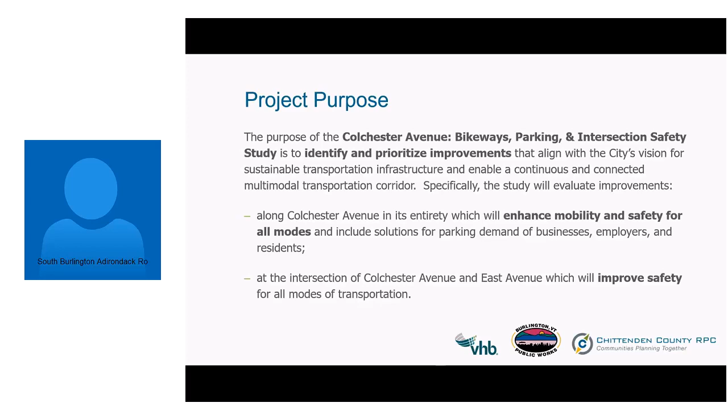This is Dave Cawley. I appreciate the inclusion of the vision elements to the purpose statement. I think that helps us get a better handle on it. One of the questions I had, and it may be bigger than we can deal with right now, is there's a question about the time frame, meaning the improvements we're making to this corridor—how long will they be in place for? Is it something that's good for a year, 5 years, 10 years? I haven't heard any sense of time regarding improvements, so I'll leave that as a comment.

Okay. Anyone else? Could I just ask a clarification with regard to Dave's question? With regard to time, are you talking about once some sort of improvement is implemented, the lifespan of the improvement, or are you asking the time it will take to build the improvement? It's the lifespan of the improvement. It helps me to think, when we think about vision and what we're trying to create, is it near-term improvements or long-term improvements? I don't think we've talked about that yet as a team. Okay, got it. Thank you.

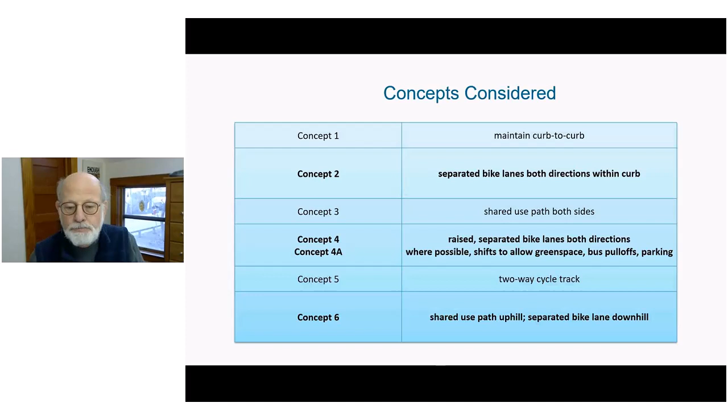When thinking about the concepts to carry forward through this process, I know the last time we all met, we had brought to you all some cross-sections, some ideas to get a sense of what elements we wanted to see along the corridor. The first couple of concepts you see on the screen now were the elements and layouts we had discussed for the corridor, segment by segment.

I think it's important that we share with this group and talk through the fact that after that meeting, we came back and generated a few other concepts or ideas that we wanted to at least evaluate at a high level, based on the feedback we were hearing from the group, to see if those elements would work along the corridor.

So we landed at generally six concepts that we discussed with the project team here and the folks at the CCRPC and the city, to carry it through the next step of the process and see if the things we were calling for in that meeting and the feedback we were hearing were concepts that would work, so that we could land at alternatives that had the elements everyone was calling for.

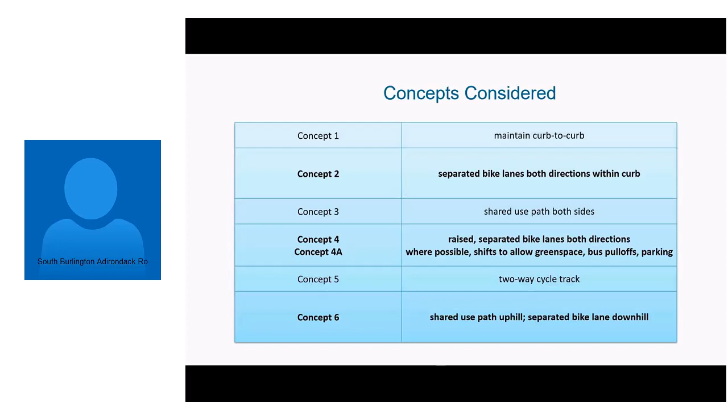Concept 4, and then 4A, which you'll see later on, that's why it's bolded here: raised and separated bike lanes in both directions. And then we have a version of that where we've done some enhancements to create a little more green space, some bus pull-offs, some parking where possible — getting at that balance of impacts to the back of sidewalk and beyond with some of the elements folks are calling for in terms of more green space, more transit accessibility, more space for parking.

And then concept 5, a two-way cycle track. We did at a high level evaluate an option of having a two-way cycle track along the corridor. I think ultimately we decided that the contraflow, especially with a steep grade section like the hill down into Winooski, was really challenging to find a safe way to implement. But we did have a pretty lengthy discussion about that as an option, and ultimately decided not to carry it forward as an alternative through this process. But we definitely wanted to highlight that we had taken a look at it and really tried to see if it would work for this corridor.

Just to orient you quickly, what you're seeing on the screen is an aerial image in the background with yellowish, tannish filled sections representing sidewalk or pedestrian space mostly. In some cases with the wider shared use path, we're maintaining a 10-foot wide shared use path, highlighted in that same color. The dark gray fill is along the bike infrastructure. So that's a way to highlight where we're anticipating pedestrians will be and where we're anticipating bikes will be in this particular option.

Starting from Prospect and moving towards the hospital entrance, you see that 10-foot shared use path on the south side that we're maintaining essentially where it's proposed to be when construction starts this summer. We're maintaining along this section basically where the sidewalk exists today, but the major changes here are that we're bringing the curb in pretty significantly along this segment and have a raised and separated bike lane.

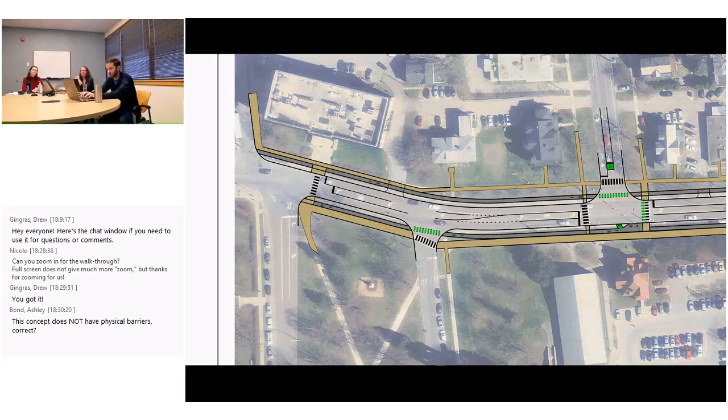You'll see it tends to be adjacent to the shared use path on the south side. The idea is there would be a small curb that vertically separates the two, giving that distinction, and the pavement surface treatments would be different. In a lot of places you'll see asphalt pavement for the bike lane, and then maybe a 2-inch or 3-inch vertical separation up to a concrete shared use path on the south side, or a concrete 5-foot sidewalk on the north side. One over, just so they can see the rest of the sheet.

Sort of bring you along here.

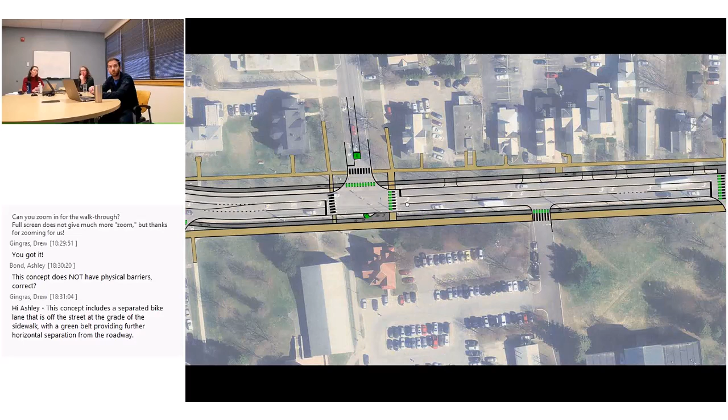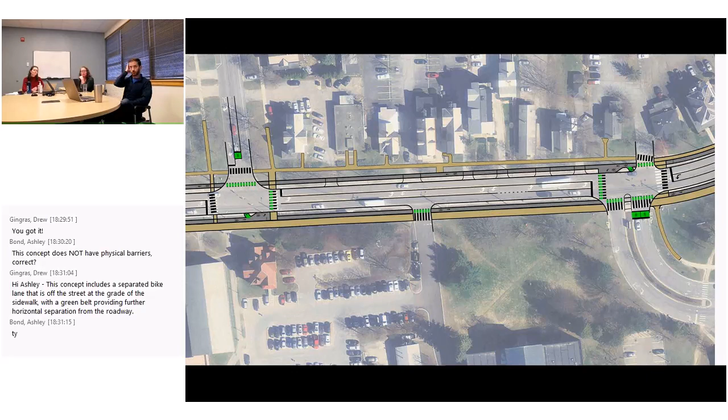Some of the elements we were adding in are definitely looking to accommodate both bikes and pedestrians at intersections. At the intersection of Mansfield, we're anticipating a shared use path on the east side of Mansfield Avenue, accommodating both bikes and pedestrians across Colchester Avenue, and giving bikes an opportunity to get into the bike infrastructure from that intersection. So if you're coming off of Mansfield and making a left, you have a way to get onto the bike lane eastbound.

Similar treatments at the medical center driveway, sharing the crossings for both bikes and peds, making sure both are accommodated and allowing folks on the westbound bike lane to make that left into the hospital entrance.

If I could just weigh in, I took a look at the operations of this intersection. It's already operating near or at capacity currently, and there's housing development with residential units proposed on the north side. Even with the current signal timing, which only has 10 seconds of lost time for advance start for pedestrians to cross before the UVM Medical Center Drive gets the green, it's already experiencing problems. So there will be a bit of an impact to vehicle capacity at this intersection in order to accommodate all the crossings we're showing here and ensure bikes and peds cross safely.

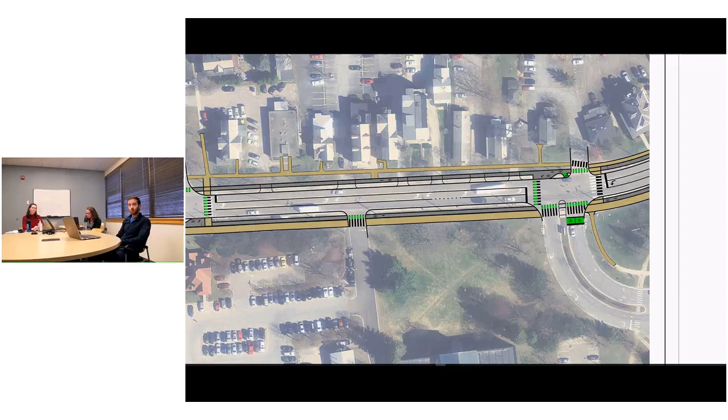I bet you have to make it. Yeah, I'm trying to navigate how to actually do that. Okay, sorry for the delay.

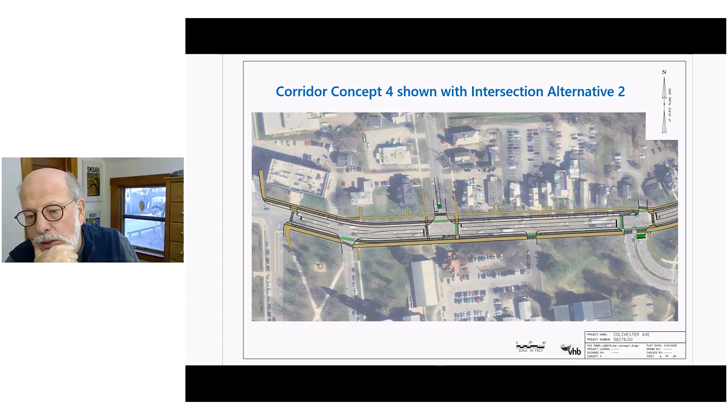All right, so moving east. I have a question, just to be clear, will the bike lanes be raised on both sides of the street in this scenario? Yes, that's the intention on this one.

Maybe just to give some visuals: your typical 6 or 7 inch curb reveal from the edge of the vehicle's travel lane, and in this case along this segment, a 6-foot green belt so we can accommodate some street trees in that width. Then at that height of your typical green belt would be the bike lane, essentially at the same vertical height as your green belt today.

Hi, this is Chris Damiani from Green Mountain Transit. I was also just wondering if in future drawings for this, we could overlay the GMT bus stops on there, just to make it a little easier to see where those potential conflict points are.

Absolutely, yes. And one other thing, I think I sent this after our last meeting, but it'd be great to potentially see if we could have some sort of, it's great that the bike lanes are going to be raised, but also include some conflict markings where those bus stops are on the bike path. Good comment, thank you.

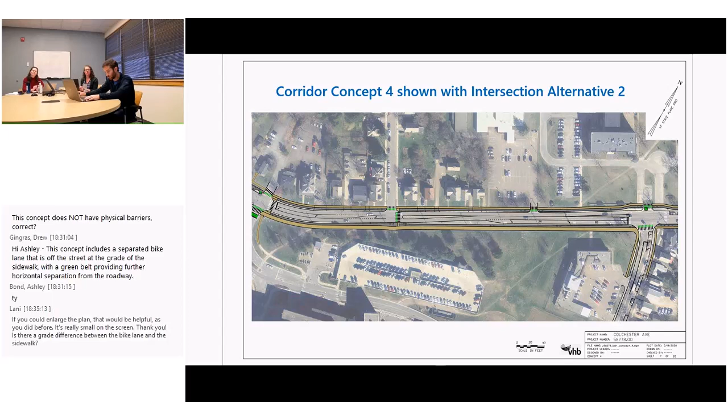Okay, do you have it somewhere? Like, do we have a schematic that has all the dimensions so we can see? It's kind of hard to judge now. We can prepare that, since we had developed those previously for the alternatives, and we can certainly do it for these new alternatives as well. Okay, all right, thank you.

So continuing eastward, we had heard that the mid-block crossing rapid flashing beacon at Fletcher Place has been a success. Building off of that element, we're adding a left-hand turning movement for bikes to share that crossing with pedestrians, getting folks onto Trinity campus and into that neighborhood a little more easily from the bike infrastructure.

Continuing along the corridor, it's worth mentioning the alignment is a little different with the right turn lane. Instead of folks just ending up in the right turn lane, the roadway actually realigns eastbound so that you are making a conscious choice to get into that right turn lane.

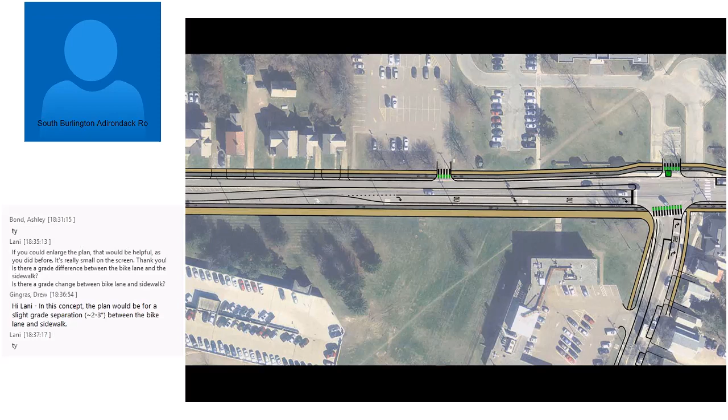Approaching the intersection, in this alternative, we're looking at keeping the bike lane to the south of that right turn lane and then accommodating the bikes via a signal. So instead of bikes having to mingle with traffic and get into a through lane to continue eastward, in this case they would stay to the south of those right-hand turning movement vehicles and be accommodated at the signal. They would have to stop and go according to their own signal heads, most likely.

Drew, do you want to comment on how the bikes are making the left turns here? Yeah, so just reflecting back on the first advisory committee meeting and the public meeting, we had a number of comments about left turning cyclists, so we've instituted along the way here either a bike box treatment or a two-stage left turn box treatment, dependent upon the intersection.

For instance, at East Ave, for a westbound cyclist along Colchester Avenue looking to travel along East Ave, we've shifted the bike lane and the sidewalk, as well as the UVM drive in this case, since it's a 90-degree four-way intersection. We've shifted the bike lane and sidewalk north a touch to create space for that two-stage left turn box. So a bike traveling west along this facility would queue in that box in front of traffic coming out of that driveway.

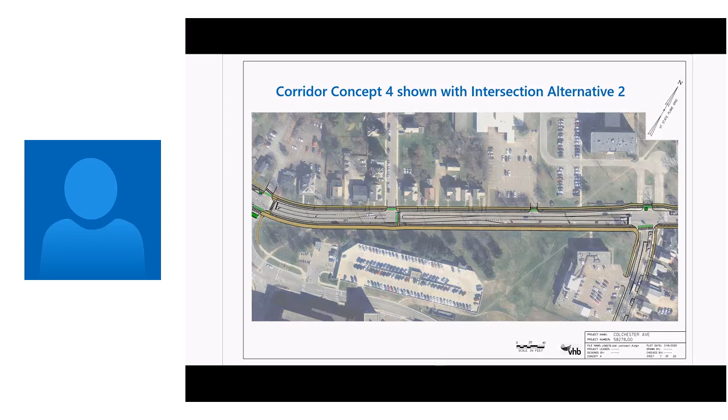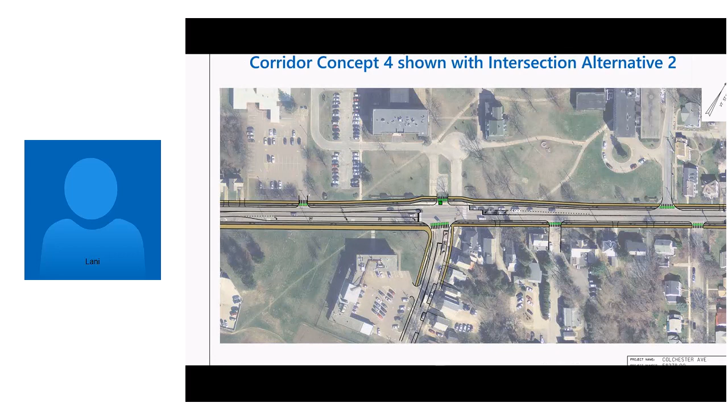And that's just more of a centered look at that intersection with the realignment. With the realignment for UVM, do you know anything about the infrastructure underground?

We do not. The exact alignment would have to be developed once there was actual survey and some of those details are determined. Because truly, in this concept, we didn't realign East Avenue that significantly, and the alignment could shift either further to the west or stay closer to where it's currently located to the east. There's a possibility it could be realigned far enough to the west that it would be over the driveway that's currently a stub but already a driveway to the north. So there's a number of options here for how this intersection could be aligned once it goes to survey and construction, but obviously the goal is to make it a standard four-way intersection because that's best operationally for everyone.

Thank you. I have another question about the height differential between the sidewalk and the bike path. Is there precedent for a 2 or 3 inch differential? I'm thinking, is there a safety problem with such a small difference? Will people trip or will bikes bang into it?

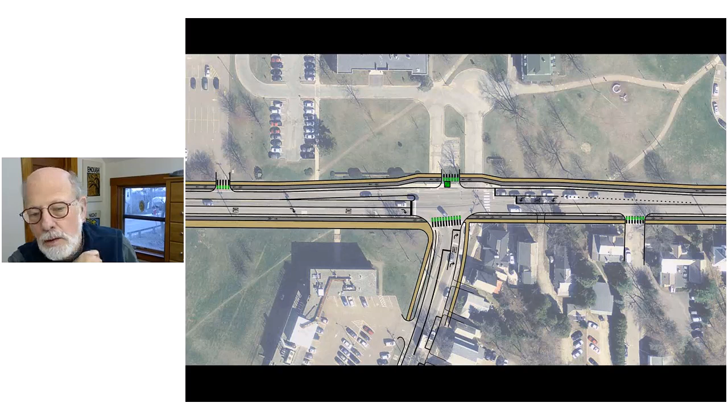All right, so continuing along the corridor on concept 4 here. A question just before we leave East Ave: can you describe the changes happening on the northbound side of East Ave at the intersection, as you're heading north towards Colchester Ave? Oh, East Ave. No, here we're just showing a slight realignment, and one of the things we did do is eliminate that first parking area. It's not a significant change. What that does is give us a little more queuing space for those right-hand turning vehicles, so we're able to accommodate that movement a bit better by eliminating, I think, essentially one parking spot close to the intersection.

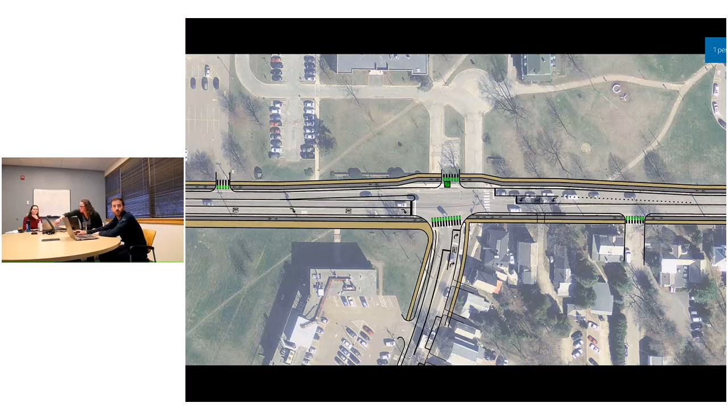Thank you. Hi, can you hear me? This is Sharon Busher. Yes, we can. So there's actually more than one parking space there, because those were put in place, I think at least two, when the India House first went in to accommodate their drop off and pick up. I can't remember if it's one or two hours, don't remember the limit, and certainly not easy to enforce since no one's checking how long people park there. But it's more than one space. So are you eliminating all of those spaces that have a sign saying one hour or whatever? I believe it was a total of 3 spaces, two up close to the intersection and one further back. We can confirm that. I'd say at most two spaces would be removed in this concept to create more queuing space for that right turn only lane. Okay, so two spaces. All right, I just wanted to understand that better. Thank you.

Okay, any other comments on this alternative at the East Ave intersection before we move eastward? Okay, we will see the East Ave intersection again, so we can always come back to it.

So here we have some side streets where you can see the shared markings, bikes crossing at the bike lane, sidewalk, crosswalks - that's a typical treatment. The other thing I want to highlight is that directly across from these streets, the intention is to give folks the opportunity to get into and out of the bike infrastructure, but not necessarily formally accommodate a crossing of Colchester Avenue. So if you were a westbound cyclist wanting to make a left into Latham Court, you could get through with a curb cut and make that left when there's no traffic coming. We wanted to accommodate getting folks into and out of the infrastructure, but with lots of caution, not formalizing those low volume crossings at some locations. You'll see more of this as we move eastward and these neighborhood streets come up a lot.

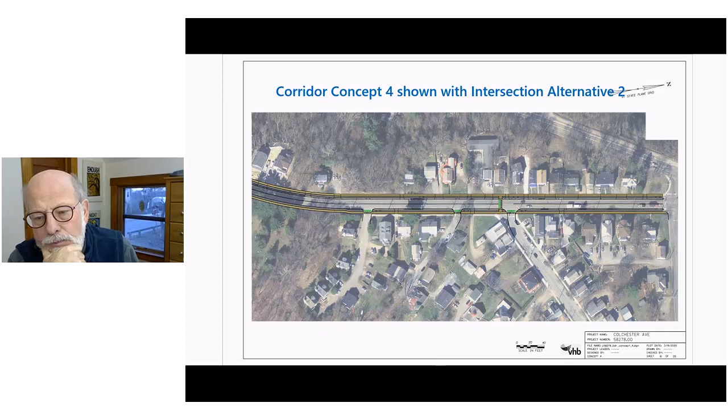A question about parking in this section - is parking being eliminated in this section of Colchester Ave? In this alternative, it is, yes. With this concept, we're looking to add the bike mobility enhancements and make sure we have some streetscape elements, but yes, we've eliminated parking in this particular concept.

All of it? In this alternative, yes. And just a reminder, in this stretch there's currently no parking.

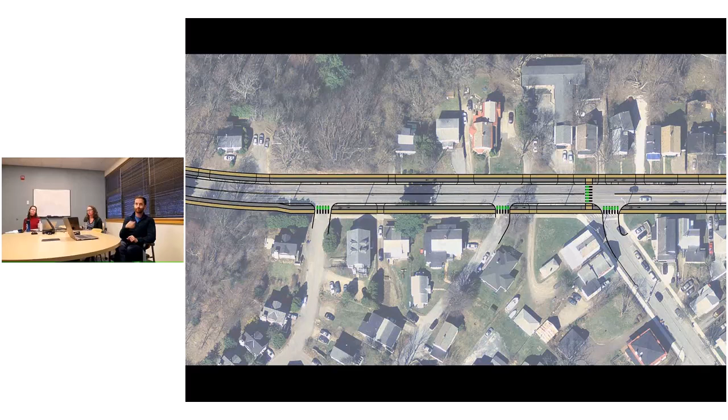Yes, so in the last slide there is existing parking along this stretch that we would be eliminating in this concept. In the next slide, the parking has already been removed as part of the last project along the corridor.

Hi, this is Jason Stuffle.

I was wondering if I could ask a question. I couldn't quite hear, but is this all within the existing back of curb to back of curb along this section? And if it's not, where is it, maybe being expanded into the neighborhood properties?

Well, actually, in this section, you can tell if you look to the left of your screen, in some places it's actually within even the front of curb of the sidewalk. You can see it's not even going as far as the back of curb. But to the east, I believe it is, Karen, is it by just a couple of feet? It's going outside the existing back of curb.

So in this concept, we tried really hard to maintain back of sidewalk, and in most places we were able to do that. There were 1 or 2 feet of impacts in a couple of locations. And across the board, we've attempted to maintain, for places where cars are parked in front of houses, like what you're seeing to the right of the screen here, maintaining storage length of at least 1 vehicle if there are impacts to those properties.

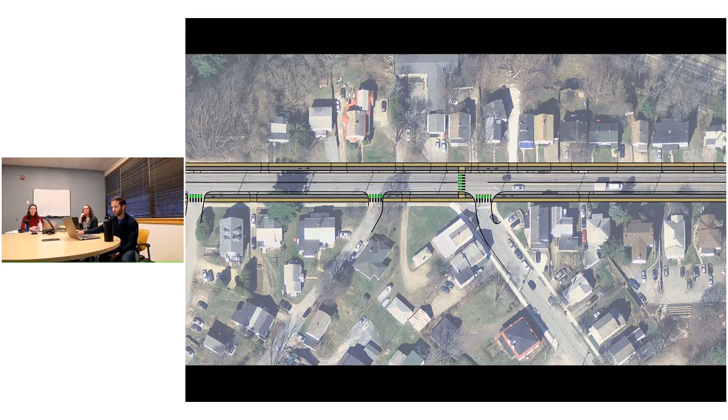Thank you very much for that. I know it's a sensitive subject for people who live in the neighborhood, so thank you. Definitely.

Jason, did you have something? Yeah, I just thought it might illustrate your point about how far you're encroaching beyond the back of sidewalk. With the previous slide, there's that one house that has like 3 or 4 cars on the ortho. They don't have much room. If you took 5 or 6 feet, they wouldn't be able to park their cars there anymore. And I guess when I was looking at your drawing, it looked like, I think that's just east of Nash Place. Is that the road? Yep. Those 4 cars that are there, that's my neighbor.

I was going to say they almost currently encroach on the sidewalk. If there's a large pickup truck there, the room is barely enough to prevent it from going into the sidewalk. So they would definitely lose all those spots there.

That's what I'm saying, it's a sensitive subject for people along this corridor, and a lot of the houses are like that. But I don't think we went any closer at that house. That's one we were watching our impacts at because we know how close they are and that they use that space. So we'll call attention to which areas we went outside of the existing back of sidewalk, and we'll let you know that.

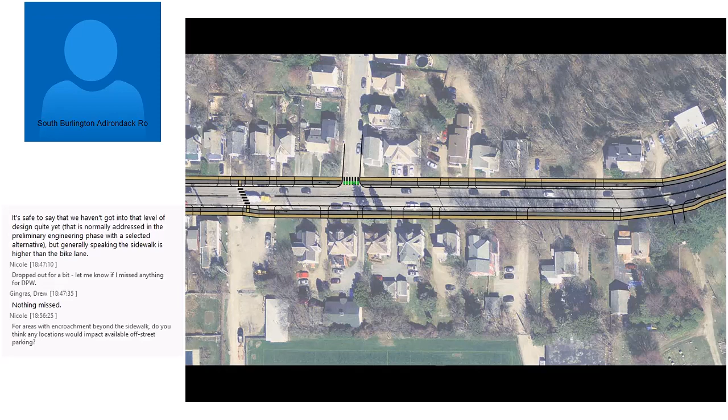I guess it's important to note, maintaining that 3-foot green belt along this stretch on the north side is sort of the balance to keep that back of sidewalk along this stretch. So you get a narrower green belt than maybe something that could have more of a streetscape element, but minimizing the impacts to the neighbors is definitely the name of the game along here.

So the maximum impact we're anticipating in this alternative is 1 to 2 feet, correct? Yes. Nicole asked if we think any locations would impact available off-street parking. No, we stayed away from any location like this, so it should not. I don't think the ones further down the hill where people are parking right out by the edge of sidewalk - I think we purposefully moved the alignment at those locations.

That's a change from when we came before you last. When we first came, we basically just did an offset from the center of the road and laid things out. This is a little more finessed, so we've moved things around depending on where the most significant impacts would be and tried to avoid those impacts. But we can be responsive to what Jason had asked and provide information as to which properties that impact will be at.

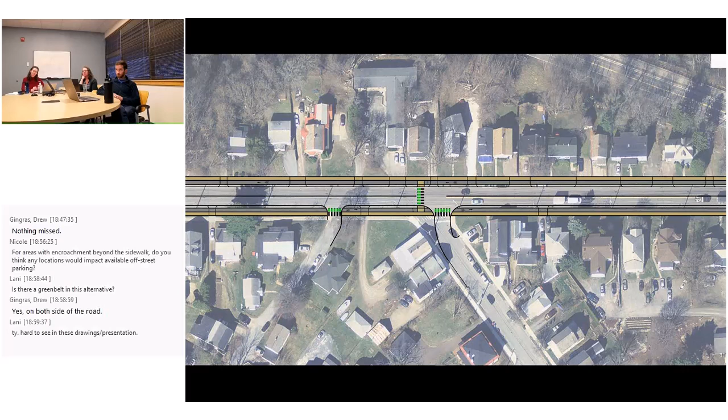Thank you, I just want to note - this is Ashley, can you hear me? Yes. Most of our ambulances, we tell them to use exit 14 and come into the hospital from that direction. So the majority of ambulances coming up Colchester Avenue are actually the local ambulances responding to the Winooski and Burlington neighborhoods in this area. So thank you very much for keeping that in mind.

No problem. Okay, so that's it for this alternative. All right.

We're going to take a look at essentially concept 4, but with a number of enhancements. I think we'll cruise through this one a little quicker. You're going to see essentially the same design elements along the corridor, but we've been strategic in selecting a handful of locations where we felt the balance between minimizing impacts and having other elements like better bus accommodations, better opportunity for parking - some of these other pieces we've incorporated. Just to give you a sense of those pieces and where we think they might fit.

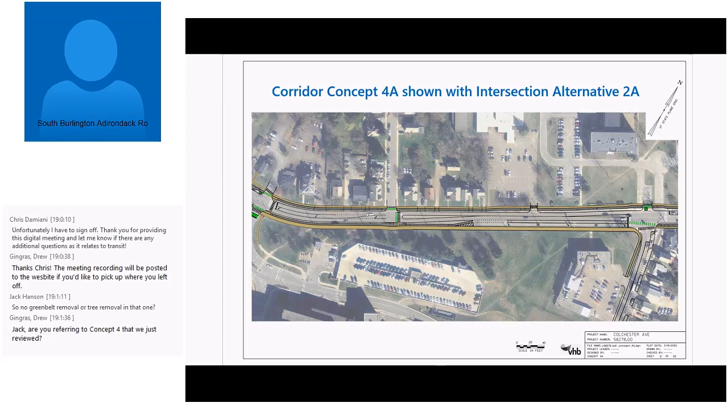So on the last one, just zoom in a little so they can really see that. On the last concept and intersection alternative, we were carrying the bikes south of that right-hand turn lane. And in this case, we're bringing the bikes up north of that right-hand turn lane.

So bringing them up, basically allowing them to move with the vehicles through the intersection. So bringing the bike lane up and making that through movement served by the signal, sort of as it is today, right, through movement with the vehicles. So it results in much easier to understand signal infrastructure.

The one thing I would point out, though, because it was the thing that I think folks have trouble with currently, is how does the cyclist who is in that lane coming from, say, the UVM Medical Center, find a way to fade over to get into the through lane against cars that are trying to fade to the right to take a right-hand turn.

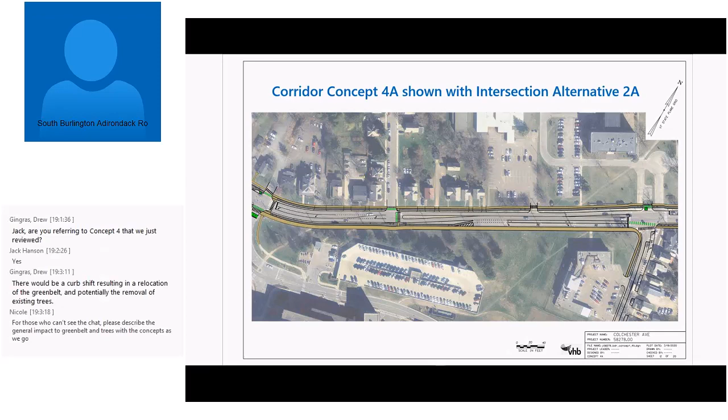And so on the left side of your screen where you see the bike lane, above that is actually a hard curb. So we see this as a hard curb encouraging the cars to shift to the left, and while it protects the cyclist, the cyclist then pops out and is right next to the vehicles. It properly aligns them to where they need to be, and then the right turners would cross over into the right turn lane.

And again, it just makes it easier at the signal. The cyclist would get a green ball with the cars for the through movement instead of creating the conflict that the other alternative creates, where you have right turning vehicles and cyclists trying to go through, and you have to treat them very separately. You cannot have that right turn maneuver traveling at the same time as the through movement.

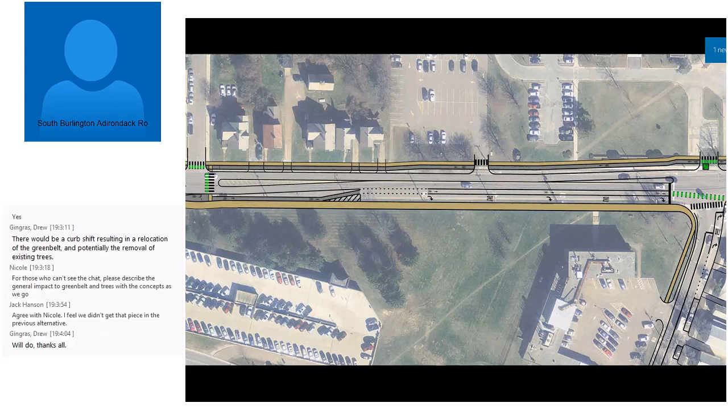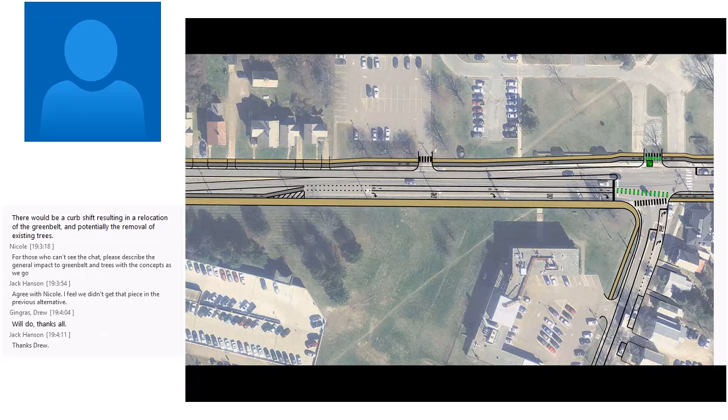Hi, so this is Jason Stuffle again. I'd just like to say this replicates that same feel through this area that I currently feel, that I'm stuck between two cars going fast with no protection, and they often switch lanes there. So I really don't like the feel of that. I don't know maybe what the best alternative is, but that's the same sort of feel through there that is currently very unnerving as a bicyclist.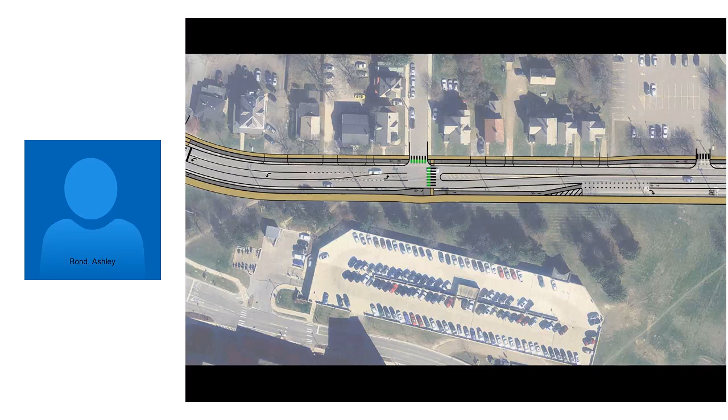Okay. Ashley? Yes, I had a question back towards the UVM Medical Center entrance. Is that an island with a curb in the middle there? Or is that just, oh, okay. We're one lane over. Gotcha. Yes. Never mind. Yep. Okay, thank you. That's okay.

So that's the end. I'd say that's really the only difference here at the East Ave intersection. But if you move on to the next, you'll start to see some of the enhancements that we're talking about.

Oh, sorry. So along this section, there is currently a bus shelter on the north side. So the idea here would be a bus pullout. We're in a section that doesn't have that shared left turn lane or the left turn pockets and additional width, so we're sort of limited by width. So giving the buses a place to get over and allowing vehicles to pass, and also giving lots of curb space for potentially another bus shelter, or a place to wait safely for transit service. So one place where that may be an opportunity to implement an element like that.

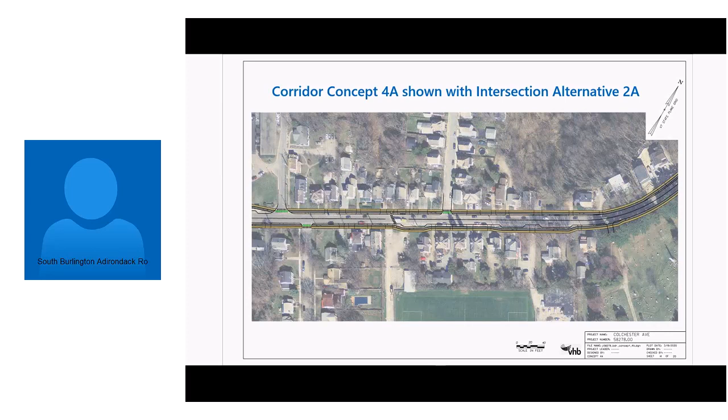And along this section, there are opportunities to potentially implement a little bit of access management here, limiting what is currently two drives out of Centennial to one, to again give some space, in this case for parking. The idea here was to get a couple of parking spaces as close to Campus Kitchen as we possibly could, without having significant impacts to properties. These properties happen to be the closest and partially into the right-of-way, according to our line work. So, limiting that impact as best we could, but conscious of the fact that there's a demand for parking in that particular location.

So getting that parking pocket as close as we could to that business, and then again sort of trying to balance the impacts to properties and the need for parking or another bus bump out. This is another location.

One of our issues identified early on in this project is the bus stop at this location, and so better accommodating that through having a bus bump out. In this case, this could fit 4 parked vehicles or a bus transit bump out.

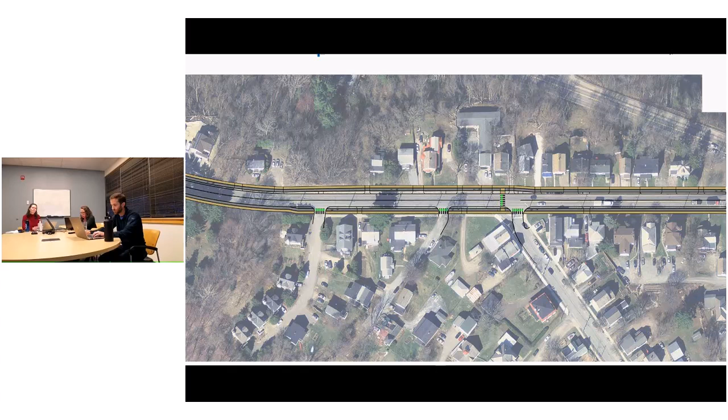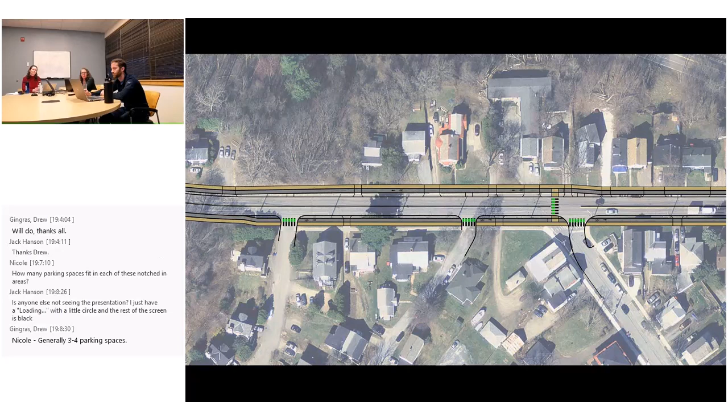So those were a few locations where we saw some opportunities to do that. Again, this concept gets squeezed along the curve based on topography, and then down along the hill we've bumped out the bike lane and the sidewalk a bit just to get the additional greenbelt space so that it's wide enough to implement some streetscape elements, some street trees potentially. So thinking about balancing impacts of where the back of sidewalk would land and getting the streetscape elements that we want to have along the corridor.

We just received a message from Jack. Is anyone else not seeing the presentation? He seems to be having just a loading screen at this time.

Anybody else experiencing that? The computer bumped me out. This is Sharon Busher, the computer bumped me out a while ago, and I tried to get back in and I just gave up. I'm just following with the printed pages, the handout that you gave. So, yeah, I'm sorry to hear that. Netflix is overloading the system. I'm sure you're right, there are a lot of people at home online.

This is Jason Charest, I'm seeing it fine on my end at least. So, okay, okay, all right. And Dave Cawley, it's working for me fine.

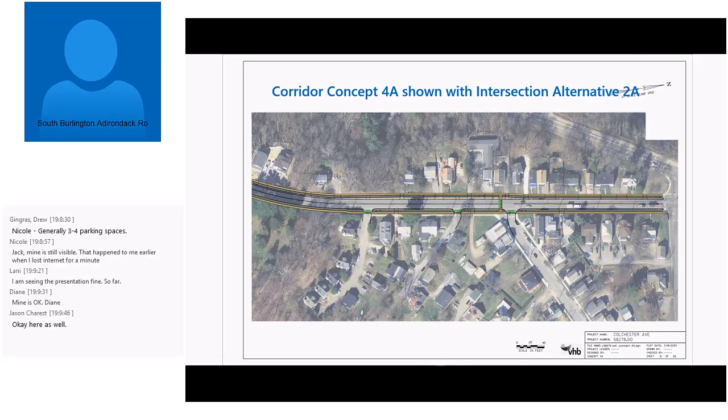All right, so concept 6 has shared use paths on basically the west end and the east end, so we'll take a look at that. And then the alternative that we'll see along with this corridor concept at the intersection of East Ave is a roundabout.

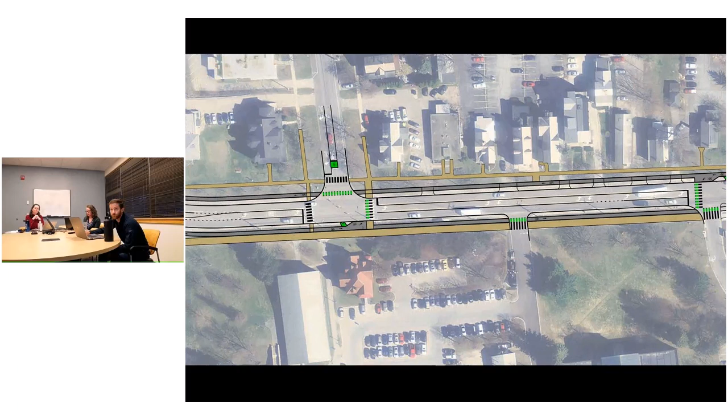And so here we're able to still accommodate, and what we're showing here is the raised and separated bike lanes, maintaining the 10-foot shared use path along this section, very similar to what we've seen in concept 4 and 4A. Through this section, and then as we approach the East Ave intersection...

Why don't you go to the next slide? And Drew, why don't you talk a little bit about how you took the concept from the corridor study, or was it from the Plan BTV, and how you then laid this out to make sure it was engineered correctly?

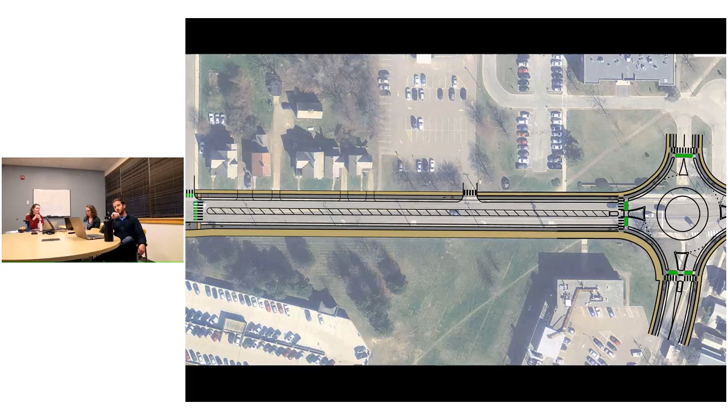Yeah, so just as a previous reference point, in the Plan BTV there was a roundabout concept done for this. The one difference between that and what you see here is that that incorporated two-way cycle tracks, and this, being built into these concepts, is really considering just one-way separated bike lanes on both sides of the road. This kind of incorporates those.

So just to give everybody a quick overview, and I assume everybody generally knows how roundabouts work, one of the key design issues with a roundabout at this location, and to address the purpose and need of the project, is to try and safely incorporate how a bicyclist and/or a pedestrian would traverse the intersection if it were to be a roundabout.

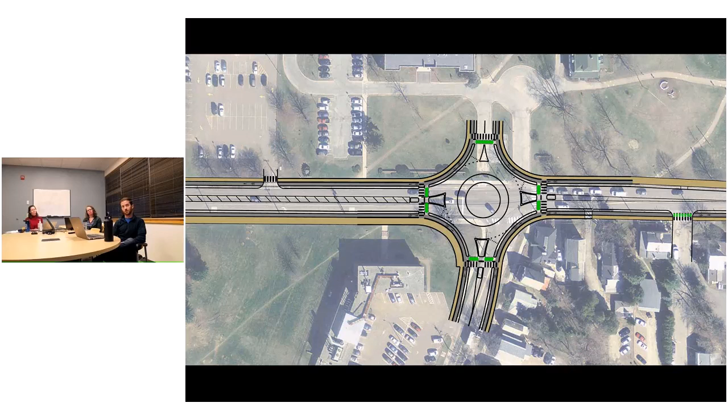And so what we have shown, kind of set back from each leg of the roundabout, are pedestrian and bicycle crossings, using the high visibility bike lane green for the crossing for cyclists, and then standard ladder crosswalk markings for pedestrians. What that setback does from the roundabout is really allow a vehicle, whether entering or exiting, enough time to see and react to those modes crossing that particular leg before or after a vehicle is entering and exiting.

So generally speaking, what we've shown here is a minimum of a 20-foot setback for that bike crossing if a vehicle is exiting the roundabout, so they do have time to see a crossing bike and yield to that, or a crossing pedestrian at those locations.

I assume there might be a question or two about this if people want to fire away.

Do you have any data on safety for this option for cyclists and pedestrians?

In general, for roundabouts, unlike a signalized intersection, traffic tends to move a little slower, so when there are crashes, they tend to be at a lower speed, which we know for a pedestrian or cyclist means a greater chance of surviving the crash. That's been widely proven, but I don't know if there are other specific statistics.

Not in the sense of comparing bicyclist movements at a roundabout. A design like this isn't terribly common yet in the United States, though it's standard elsewhere—Copenhagen and the Netherlands, for example, where these types of roundabouts are very common and work well, though there's a significantly different car culture there. So off the cuff, we don't have statistics handy, but this would be a new condition for this area, and wherever these are being installed, they're generally new in the States and being researched.

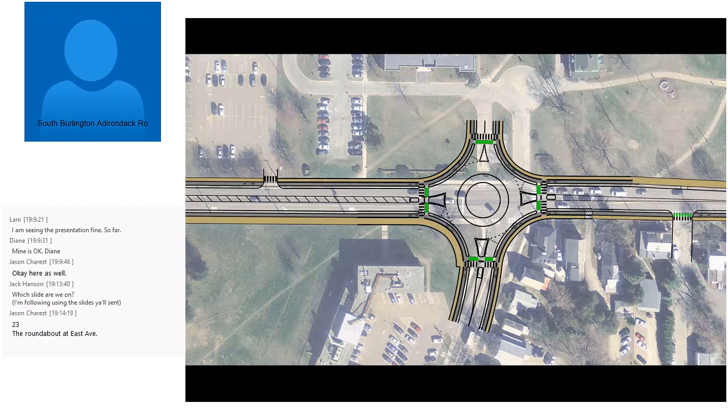This design follows national guidance published by the Massachusetts Department of Transportation, which puts out the most nationally recognized design guide for separated bike lane design, and they include this kind of intersection concept for roundabouts. We can look more into the research they did, but generally they looked to designs that have worked elsewhere.

Also, if you were to implement a newer idea like this, there would be a lot of signage, a lot of advance warning, and a large education campaign before it opened, just to ensure all users would be safe.

How big is this roundabout? Can I weigh in on this? Sorry, I'll respond to Lani's question—the inscribed diameter of this roundabout is 110 feet.

What are the right-of-way impacts at this point? I see impacts on the southwest and the north. There are actually no right-of-way impacts to the southeast corner, but there would be impacts to the northeast, northwest, and southwest corners. The right-of-way generally comes in a bit from the back of sidewalk, so it's really at the turns into the roundabout that we see those major impacts. This is also showing a potential relocation of the drive for UVM.

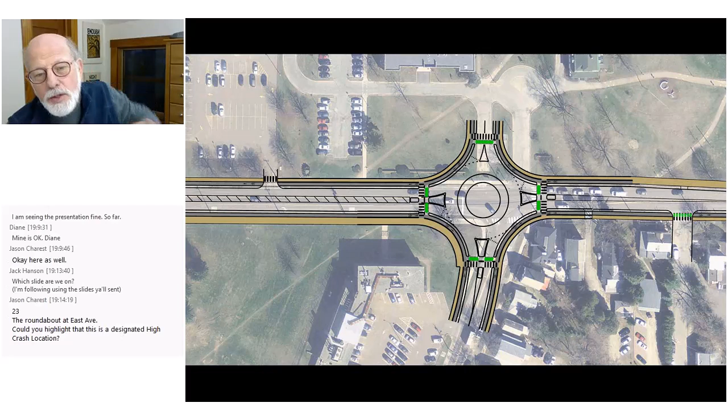So I'm assuming it would be safe to assume that off-peak we might see cars traveling the street wouldn't have to wait for the lights. That would be a benefit in the roundabouts? Yes, absolutely, that is true. Off-peak operations would be significantly improved, because all the vehicles would keep moving and just yield to each other.

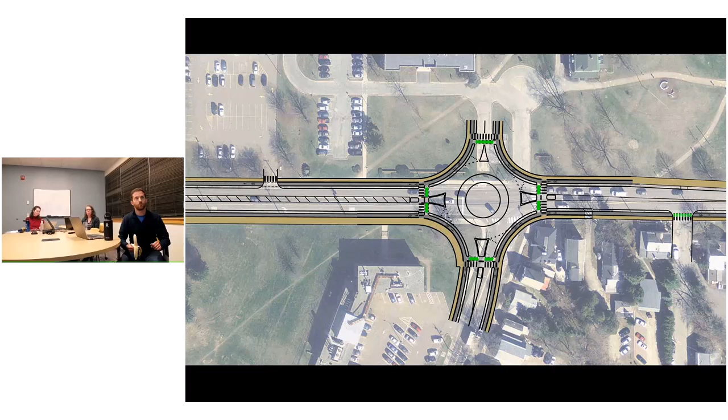That is correct. So I'm assuming that the median that you're showing on the west side of the roundabout is not raised, correct? It's just right at the crossing. Yeah, just right at the crossing it's raised. Right, so otherwise it's a striped median.

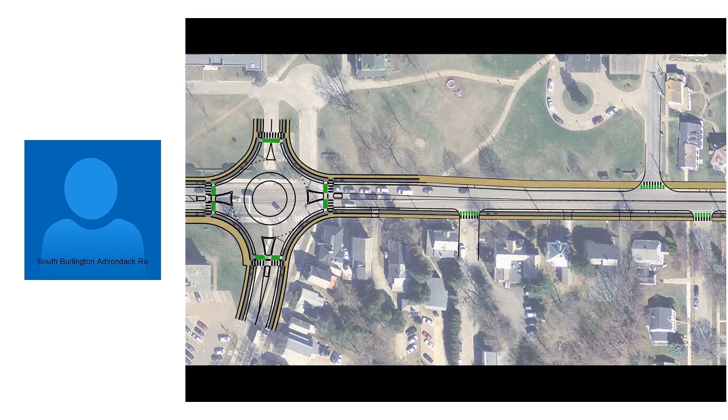So moving along the corridor, I should pause here and note that in terms of the corridor concept, we're looking at implementing the raised separated bike lane on the south side, adjacent to the sidewalk like we've seen in the previous concepts, but on the north side, implementing a shared use path, a side path. The idea here, as we move eastward, is that those uphill cyclists will be moving at a slow rate of speed, and so having mixing with pedestrians may be an okay alternative here. We wanted to take a look at what that would look like from an impacts perspective, and evaluate that option.

So you're going to see the shared use path continue along the corridor. Before you move along, Jason just raised a good point to make when we get into a conversation about safety - this is a designated high crash location. Yes, and that's part of why we were looking at this intersection in the study overall, was to try to improve safety at this location. So yeah, it's an important point to make. Absolutely. So please continue along.

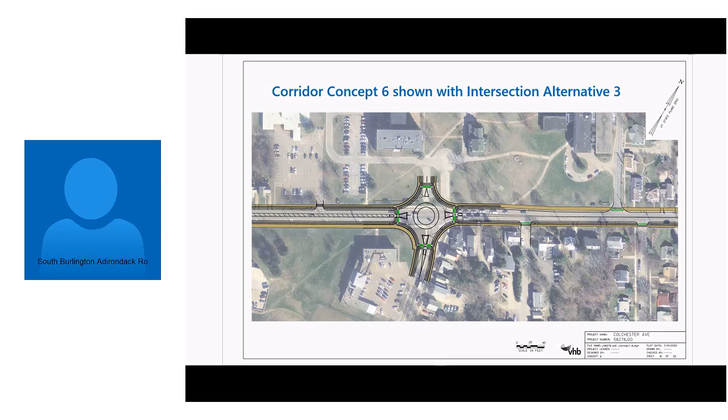Sorry about that. Yeah, no problem. So again, here you're going to see that shared use path along this segment continue on the north side, and then similar treatment on the south side to what we've seen in the previous concepts.

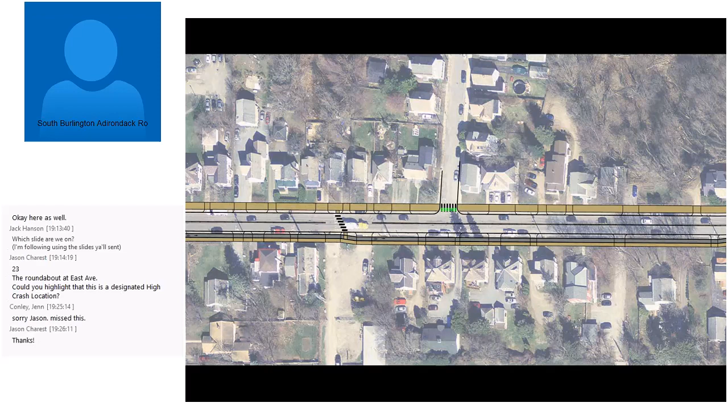And I think that impact, again similar to the previous concepts, is maintaining that back of sidewalk, or 1 to 2 feet beyond back of sidewalk, so we're able to keep the impacts to the adjacent properties as minimized as we possibly can, while having the slightly wider travel way to accommodate any emergency vehicles navigating through here. And again, we have to squeeze based on the topography at the curve section, so we're up to the curb with the shared use path along that section.

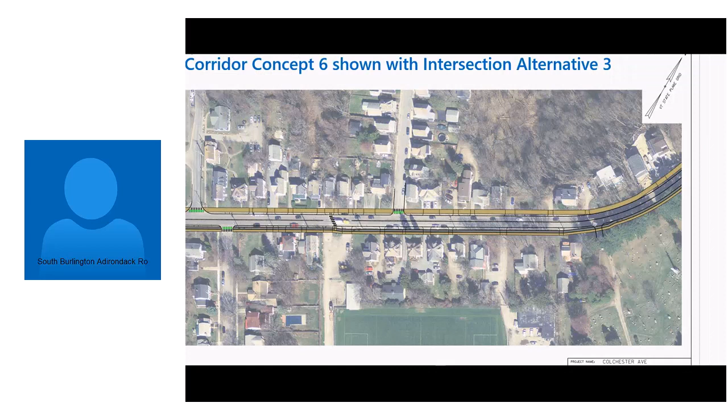But then along the hill section, the idea here being the treatment is accommodating bicyclists at a high rate of speed going downhill in the eastbound direction, and then the slower moving cyclists mixing with pedestrians in the westbound direction.

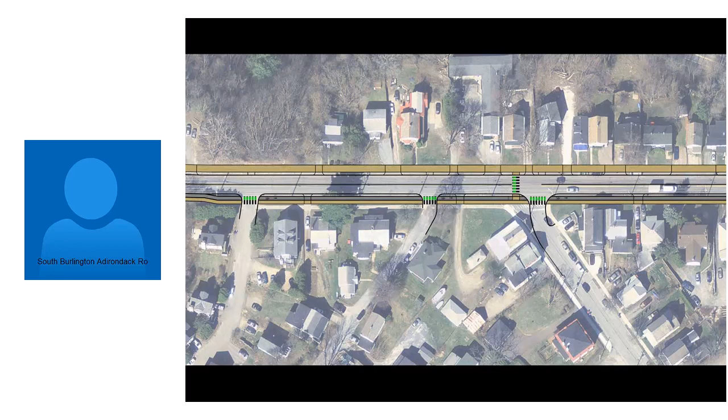All right, so the last corridor concept is one you've seen before. Yes, it is one that we had brought to this group previously, but have laid out in some more detail here, and we've coupled that with an alternative for the intersection that really is just an update to the equipment, mostly per the Highway Safety Improvement Program evaluation and recommendations, and then restriping the intersection - so making some lower impact improvements at the intersection. So we can probably move through that pretty quickly. Yes.

So here you're seeing again the sidewalk in that tannish yellowish color, and then the bike infrastructure is actually within the curb, so it's at the same level as the travelways for vehicles. The dark lines that you're seeing here represent curb, and then just inside of that curb is that bike infrastructure, still highlighted in the gray color there, so it pops out so you can see where the bike lanes actually exist. And then it's a 3-foot buffer between the vehicle traffic and the bikes.

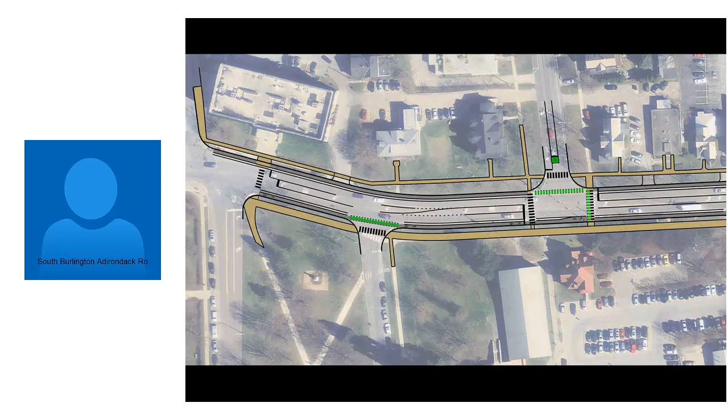And yet to be determined what the vertical element we would want to implement would be along the corridor, but the idea with that 3-foot buffer is that there would be some sort of a vertical delineator along the corridor in locations where we're able to do that, and it's not interfering with driveways or side streets. So there would be vertical protection, but this would all be at the same vertical height, both bikes and vehicles, and then obviously sidewalk back behind the curb, and some green belt.

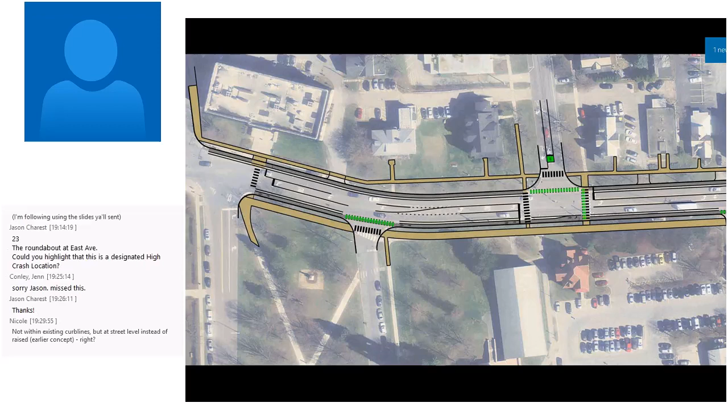And so, treatments at the intersections look quite similar to what we had seen in concept 4, carried through, accommodating those left-hand turning movements as best we can, piggybacking on existing crosswalks and features.

We just have a question from Nicole that I figured would be good to share with the group. Nicole was seeking clarification: not within existing curb lines, but at street level instead of raised, correct? Yes, and I think that's the key difference between this alternative and other alternatives.

It's really the placement of the buffer, because the bike lane could stay at street level - it could even be raised. I think what's more different between this concept and the other is that there isn't a buffer outside of it - there isn't a 3-foot grass strip. Where the grass strip falls is really significant, and we could talk about how each of the spaces are differentiated. But this was the version that had basically the cyclists closest to the traffic.

And I guess the other piece to this is that unlike the previous concepts we were showing, where we've created a vertical separation between bikes and peds and vehicles, in this case we're sort of creating a horizontal separation between vehicles and bikes, and then a horizontal and vertical separation between bikes and peds. So like Jen was saying, where that buffer exists gets shifted in this concept compared to the previous concepts.

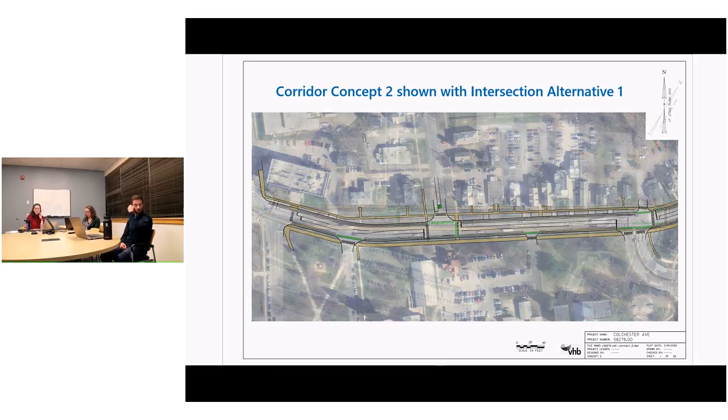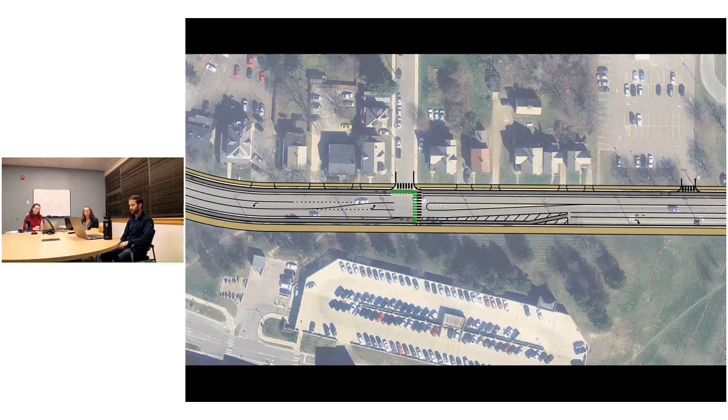And so again, carrying those treatments through the intersections, making sure that it's clear where bikes and peds are crossing, piggybacking on the rapid flashing beacon for the bike movement. And then again, as we approach the intersection, bringing the bike lane over north of the right-hand turn movement here.

So, protecting to some degree the bike up to the point that the right turning lane starts, and then getting the bikes over to match the through movement with the vehicles so they can be served by the signal sort of as it exists today with upgraded equipment. But generally, essentially the same as existing curb lines and features more or less at the intersection - so it's a very low impact change to the intersection in this treatment.

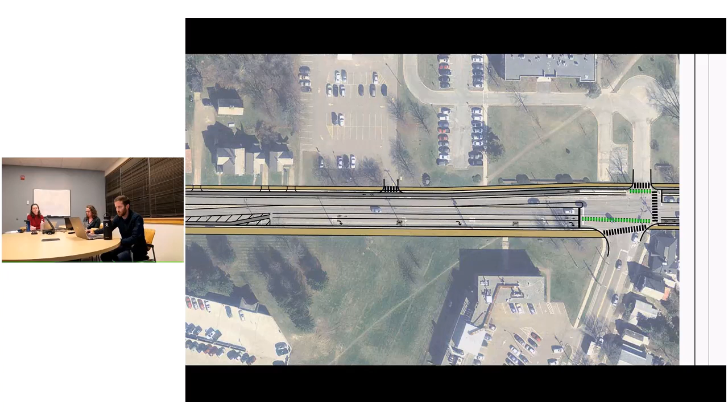I'll just click over so we can zoom in on the intersection. So bikes being served in the eastbound direction by updated signal heads, but moves with the vehicles. And just seeing if there's any other elements to call out here. I think that's about it.

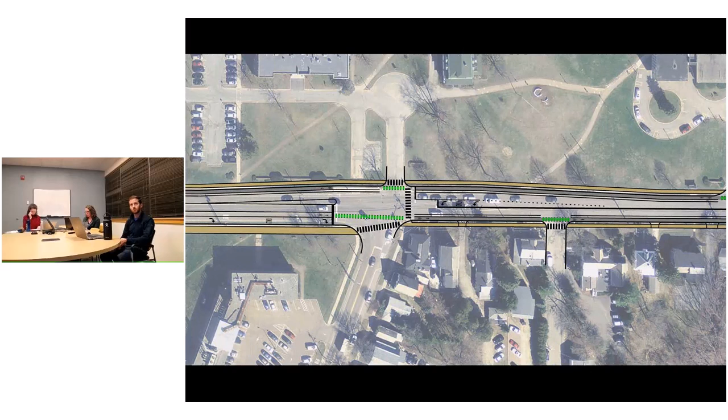Carrying that through. And again, in this concept - this is a section that currently has some parking on the south side. So in this concept, we're attempting to maintain that back of sidewalk, low impact to the adjacent properties through this pretty tight segment. And in doing so, we are eliminating the parking that exists today.

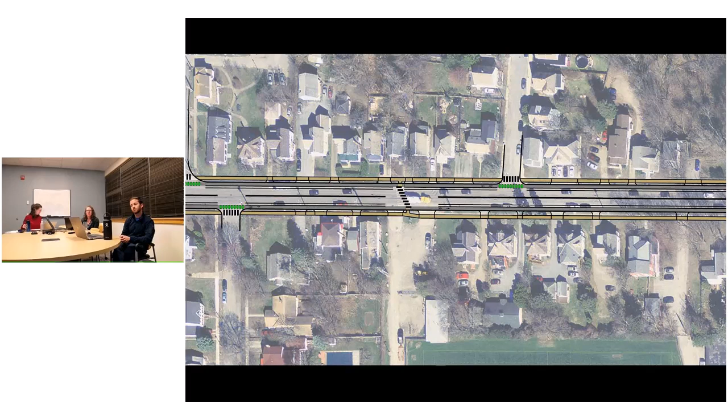Eliminating all parking, did you say? On-street parking, yes.

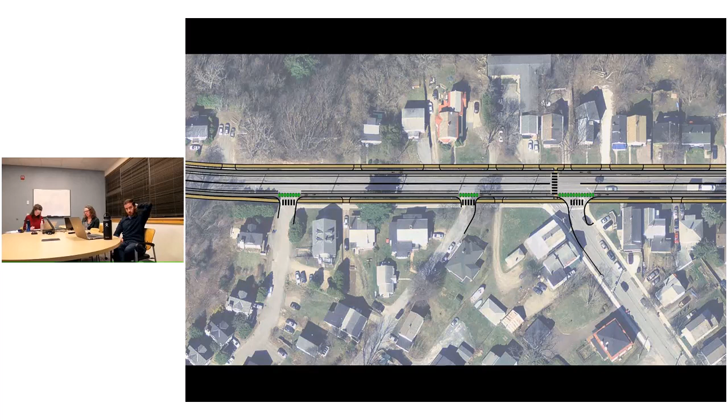And just to give you a sense of how that looks on the hill section, again, maintaining that 3-foot buffer between the travelway and the bike along the full corridor, making sure that they're accommodated crossing all the side streets - but nothing too significant to note otherwise along this segment.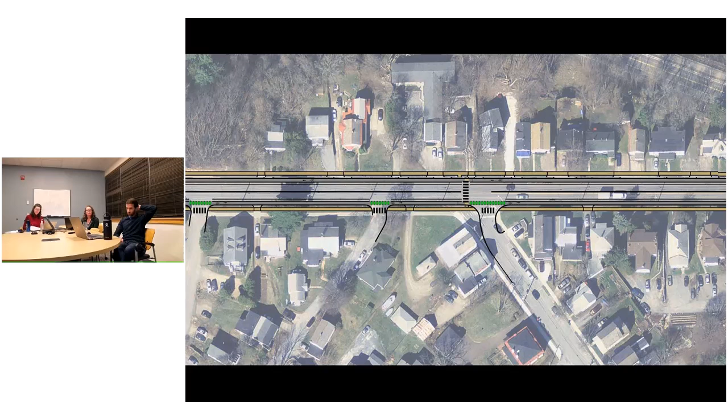So before we - oh, go ahead. Well, can I ask a question since I haven't been able to see a lot of the presentation? Can you just recap for me - when you're talking about segments with the alternatives, and you have this chart at the end that talks about parking for concept 2, the Colchester Avenue corridor, concept 4, 4A, etc., and you say reduction, and then on one of them you say maintain some, and then the other says reduction - when you say reduction, do you mean elimination of all parking? I guess that's what I really don't understand.

No, you are correct, that should say elimination. And those other alternatives, we are showing it as an elimination. Now, that said - when you say elimination, can you tell me where you're starting to eliminate it? Are you starting the elimination at the intersection of East Avenue down to where the cemetery is? Is that what we're talking about? Yes, because that's the only place in the corridor that there is on-street parking on Colchester Ave at this time.

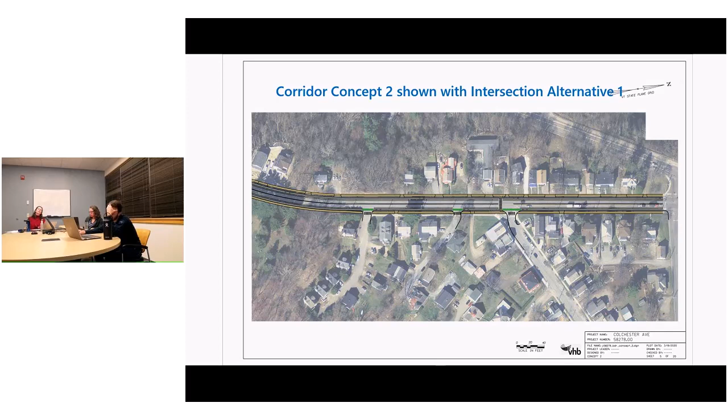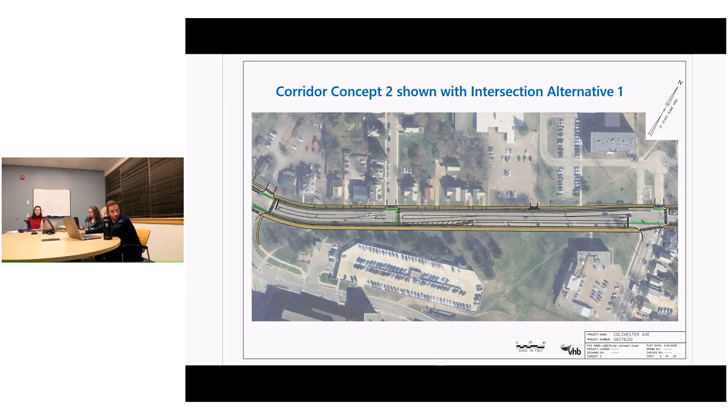You've heard earlier in the call that there are houses currently parking within the city right-of-way. If we wanted to put on-street parking in front of their houses, we could, but obviously those people would feel very affected by that. There is also then the loss of any buffer, so it does change the experience for a cyclist or pedestrian if they're right in the midst of on-street parking. It certainly is something we can look at, but we're trying to balance the needs of all of those things.

It's the folks who still want to park in the city right of way in front of their property and driveway, it's providing enough room for the cyclist, enough room for the sidewalk, and attempting where we can. I just cannot say that we'll be able to provide parking in front of Kampus Kitchen, I don't think that's a promise we can make. But could we try to do some parking bump outs in limited areas in the other concepts? Certainly, but it kind of depends what concept we go towards, and then we can try to fit the parking in that concept.

I'll just add that part of the reason we wanted to carry forward a concept like 4A is to show those elements and be able to show you all and the public that there is opportunity along the corridor if we're willing to have a bike lane that wiggles in and out quite a bit, or have sidewalks that are now encroaching on what folks currently think of as their front yard.

We can fit in all of the elements we're calling for along this corridor. Along this stretch from Kampus Kitchen down to the cemetery, we tried to show those parking bump outs and bus bump outs as a way to show we can add those features and are cognizant of those concerns, finding the strategic locations to strike that balance between impacts to properties and accommodating some on-street parking and better transit service. We want guidance from this group and from the public on where the most strategic places are to be doing that.

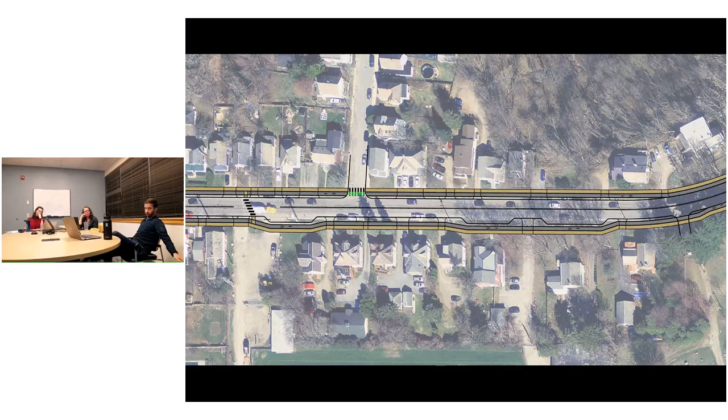I really hope that the city and UVM can have a good conversation collectively. I think we could help each other, and the residents and businesses here. I'm hoping that could provide some relief, so we could get a corridor that's safe and still accommodate some of the needs that are going to be eliminated.

This is Jason Charest. I'd like to see some actual study done into the amount of on and off street parking, public and private, and real management like zone parking in the neighborhood. We talk about eliminating parking or doing whatever with it, but I haven't seen real data on what exists in the area and how it could be creatively managed. I'd like to see more data on that.

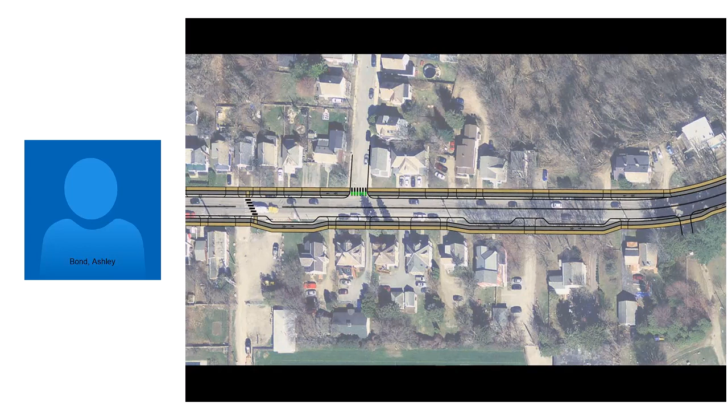I know that Jim Barr and UVM in general is interested in working with all the neighbors and stakeholders, and that has been done in the past. But yes, it's a tough situation, there's not a lot of room, and there's a lot of needs. UVM Medical Center has committed, since we took over the 195 Colchester Avenue property adjacent to India House, that after business hours we allow residents and patrons of the India House to park in that lot. That's an option we would likely continue, but if it included lunch hours we likely wouldn't be able to accommodate that.

Hey everyone, this is Will Clavel. Just want to reiterate some points already made. I've been working with businesses on the corridor, going back to the India House my first week at CEDO, and there are a lot of parking concerns. I'm all for protected bike lanes, I think that's a direction we need to move in. I've had great conversations with Jim Barr and Jason Williams about finding alternative parking off the street. But a lot of people on the steering committee have a vision for what kind of businesses they'd like to see in the area, and as we attract those businesses, parking continues to be a concern for potential tenants moving into the former India House. Something I look forward to continuing working with the medical center and UVM on. I think we can find solutions off the street, but this is a recurring issue for businesses on the corridor, so work needs to be done.

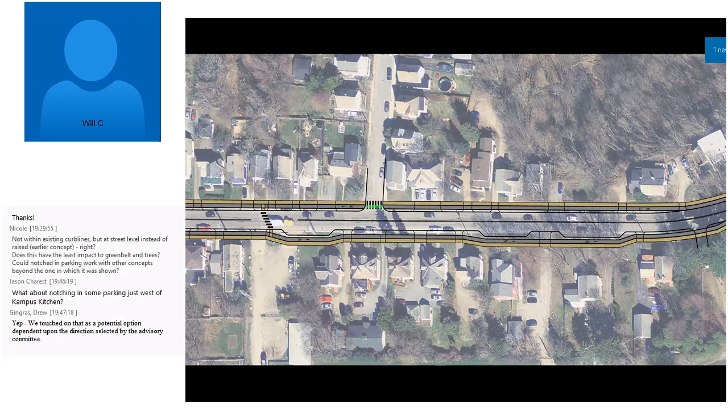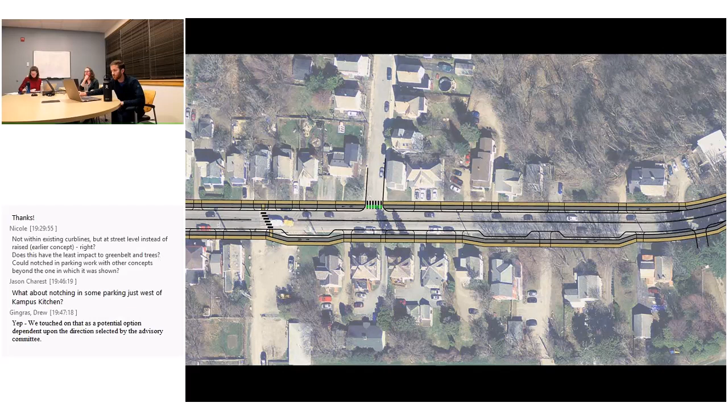Okay, did you want to say something? This is Dave Cawley. A question: has there been any preliminary discussion with the owners of Kampus Kitchen regarding this scenario of 4A shifting their parking in this manner? Do we have any feedback from them at this point? No.

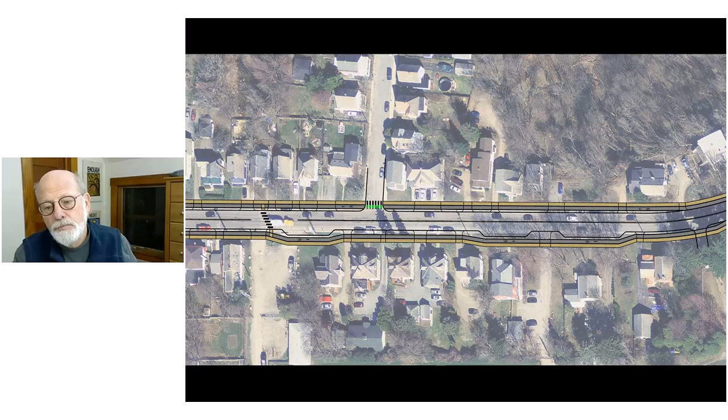I'm curious if it might be worthwhile to have some discussion with them even before going to a public meeting, because I know they're going to be very sensitive to the issues. Since you've made an attempt to accommodate some of their parking, I think they'd be interested in knowing what that scenario looks like before it hits the public. So whether we can go over and share it with them, or you might want to do that, but however it would be best to try to get them in the loop on this. Yeah, thanks Dave for that suggestion, and I think I would tend to agree.

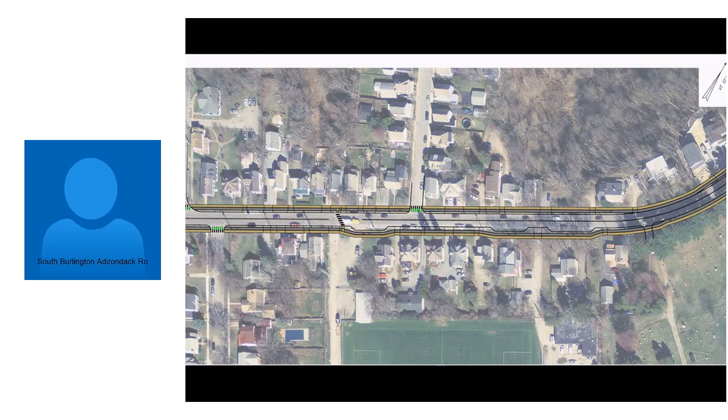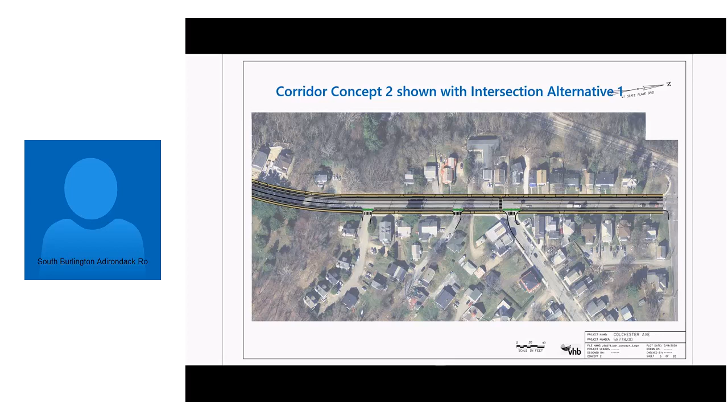I think some of this is stuff that's going to need to be digested by the advisory committee. So this would be one of those things I would like to assign as homework, that folks take a look at and provide feedback, because this is our team's perspective as to what is really good and what isn't as good in the different alternatives, and there certainly are different perspectives on that.

So we would welcome input, and it's completely true, what Sharon's comment about it isn't a reduction of parking on some of those, it is elimination as shown. But for the public meeting, perhaps we'll remember to talk about that, and that some of those bump-outs may be able to be added to those other concepts.

One other thing that came up was the question about maintaining the green belt of street trees, and that might be under aesthetics, or perhaps we should add another line for that, because alternative 2 has that as an advantage. I don't think it goes quite as far with bike infrastructure as it could, but it does have the advantage of keeping more of that green belt, which is something I think needs to hit our evaluation. So we would really welcome if there are other things like that you think we're not hitting on in these alternative evaluations.